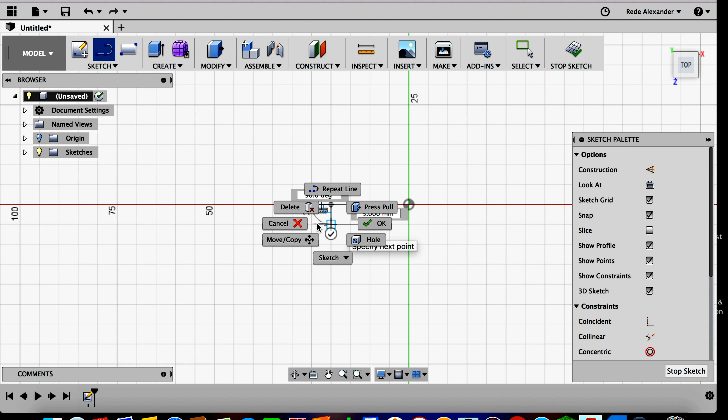I'll be showing how to make a gear in Fusion 360. First you need to do a line sketch. This will be how big the teeth on the gear will be.

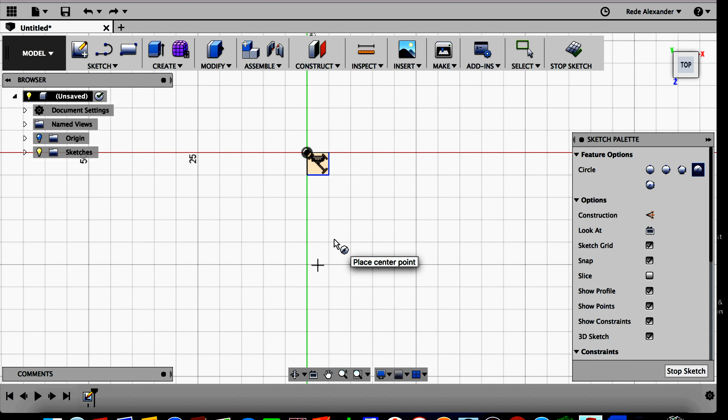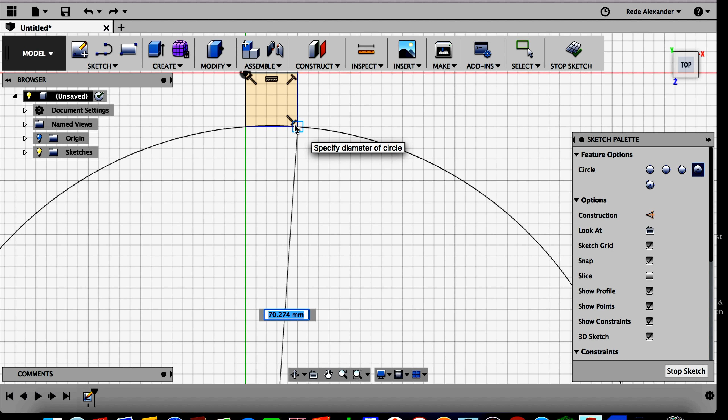Next do a circle, doesn't matter what kind. Put the center point here and make sure that they're intersecting just a small amount. Then put the other end over here on the corner of the square.

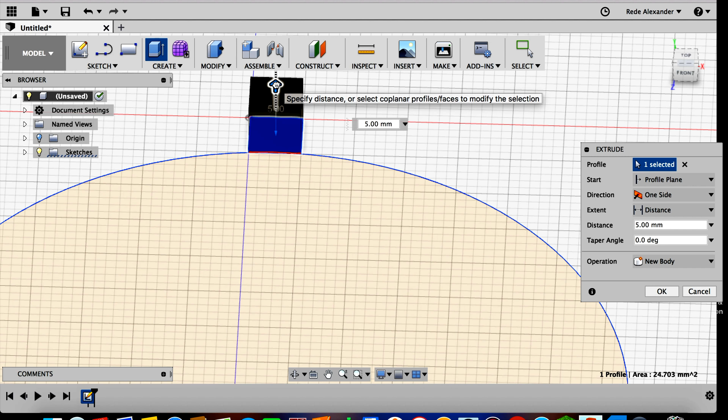Then extrude this, the tooth of the gear. Doesn't matter how.

You might have to go into sketches and make that one visible after that, but then extrude this to whatever height.

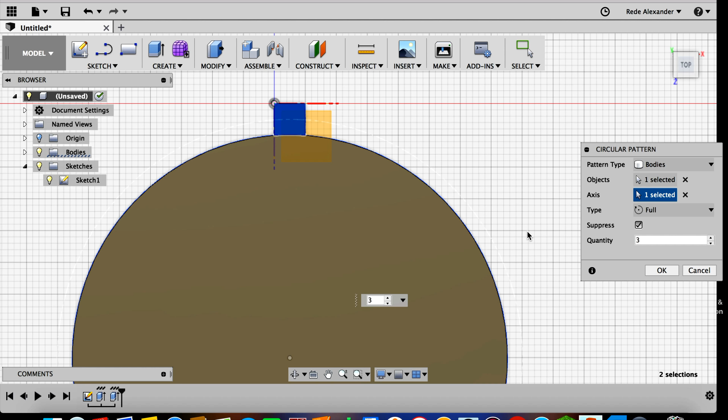Next go to create, pattern, circular. Make sure the pattern type is on bodies. And for the objects, select the tooth. And for the axis, select this.

Then just put 20 teeth for the gear. And OK.

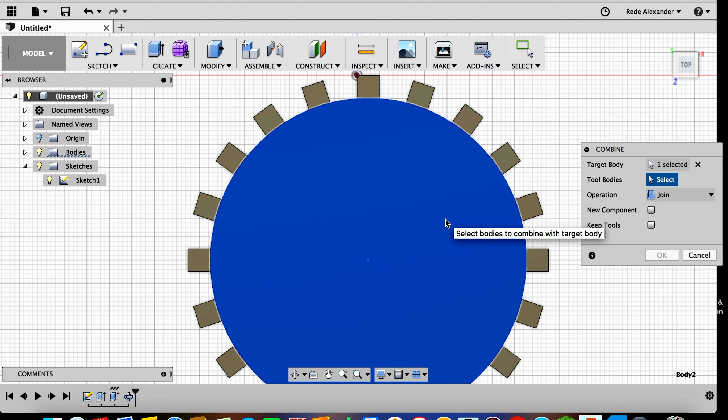Then go to modify, combine, select this as the target body, then hold shift and select all the remaining teeth of the gear.

Okay. Make sure it's on join, then OK, and there's the gear.